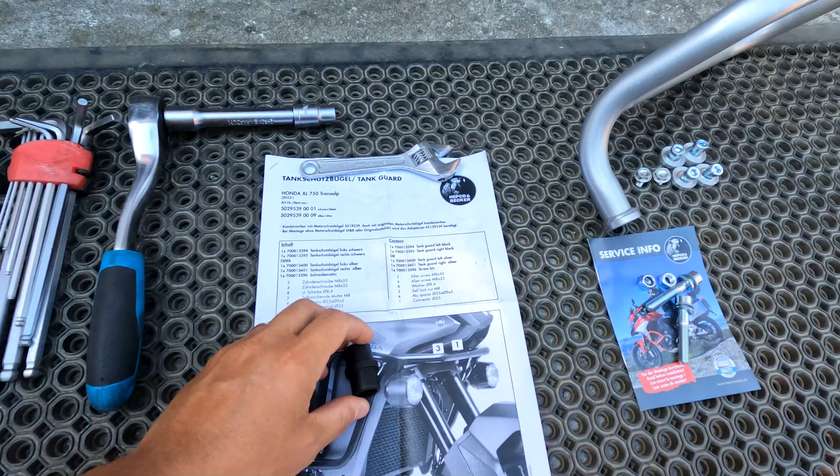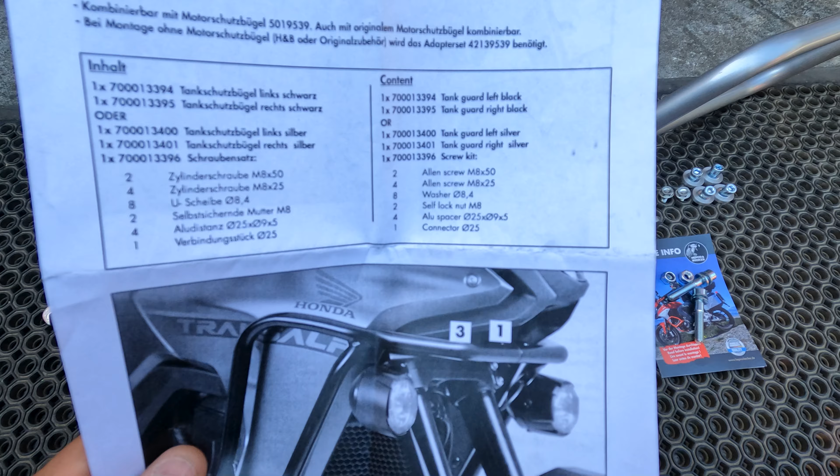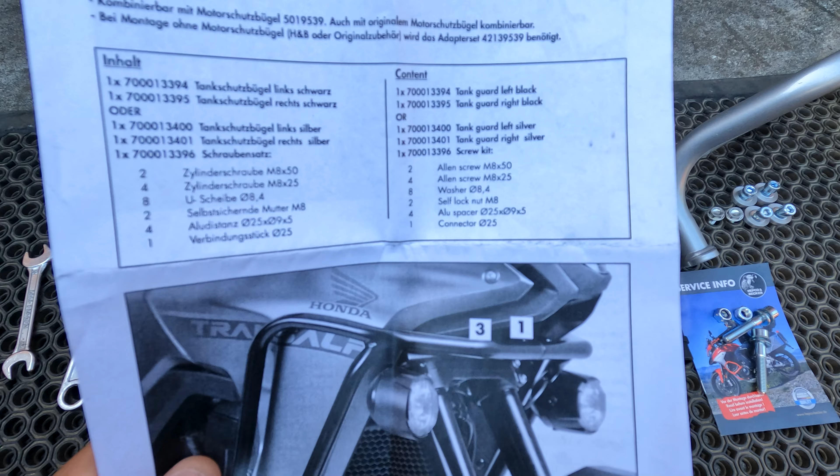Stick around. We received everything from HEPCO&BECKER, everything we need to install it properly, installation guide and so on. In the package we have 2 Allen screws M8, another 4 Allen screws M8 of different dimensions, one shorter, one longer. The longer ones are for the front and the shorter ones are for the sides. We have 8 washers, 2 self-lock nuts M8, aluminum spacers, and 1 connector which will connect both of these tank protector bars. So basically this is it.

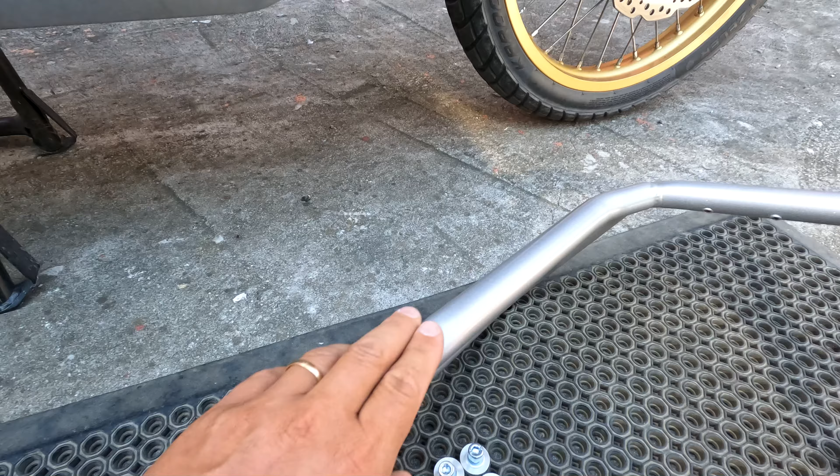The bars are looking quite nice, very quality made. When I compare the color, it's slightly different - these are lighter, but at the same time these were somehow exposed to the sun, so the color is slightly different. We're gonna check them out at the end.

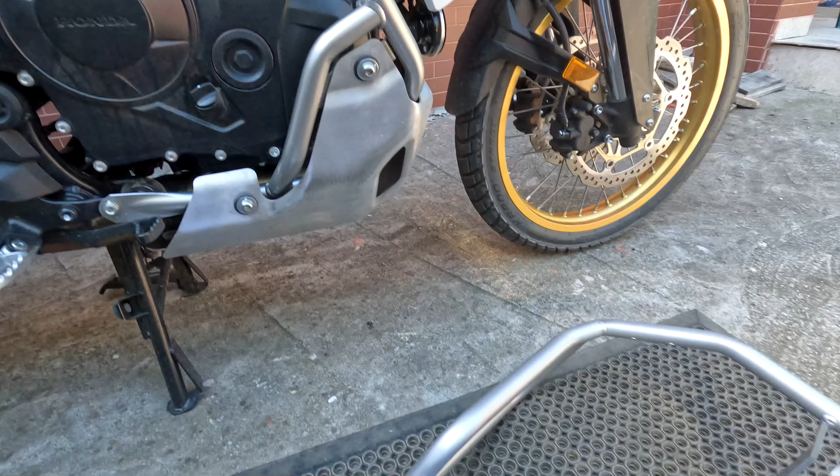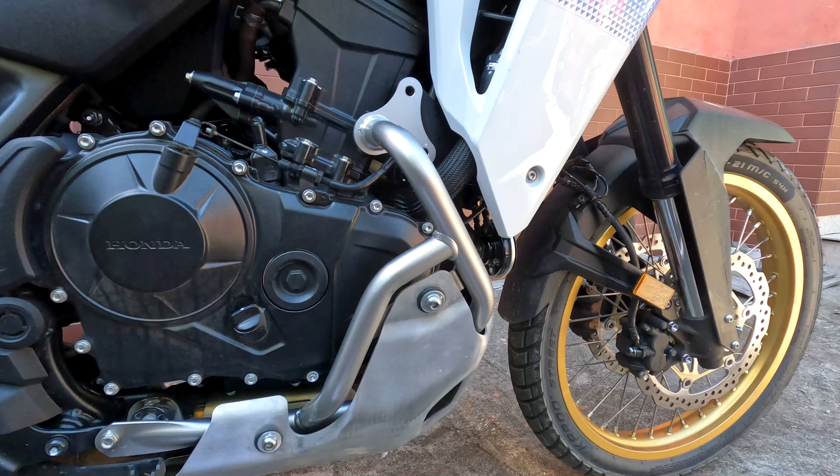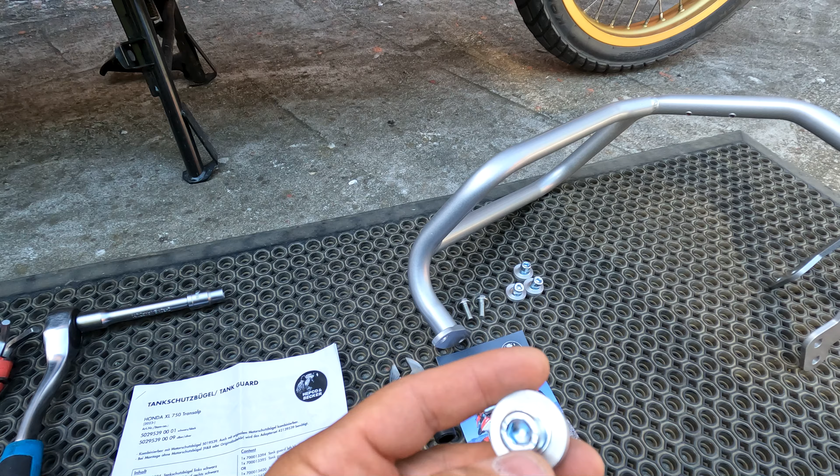What we have here are the bolts and the washers, and what we're gonna do is first try to see how it fits on each side. We have the original screws which we took out - they are slightly shorter than the ones provided by HEPCO&BECKER. These have the Allen screw M8, and one thick washer for each side. So we're gonna use these ones from HEPCO&BECKER and keep aside the original ones, which are slightly shorter. I think it's better to use the HEPCO&BECKER.

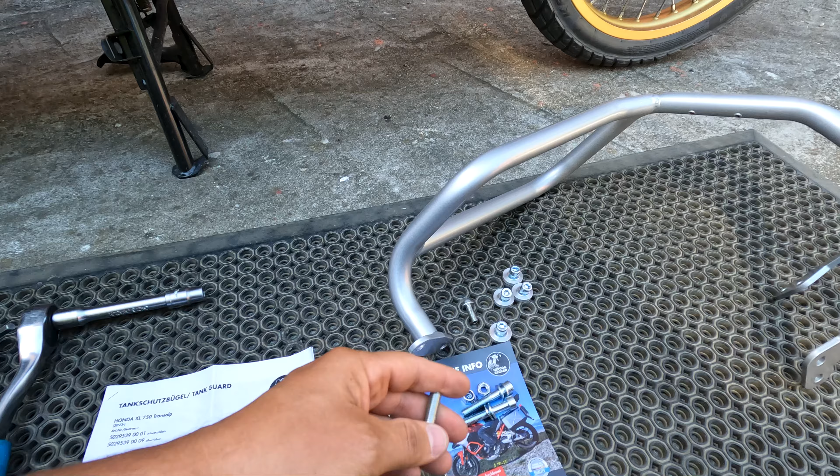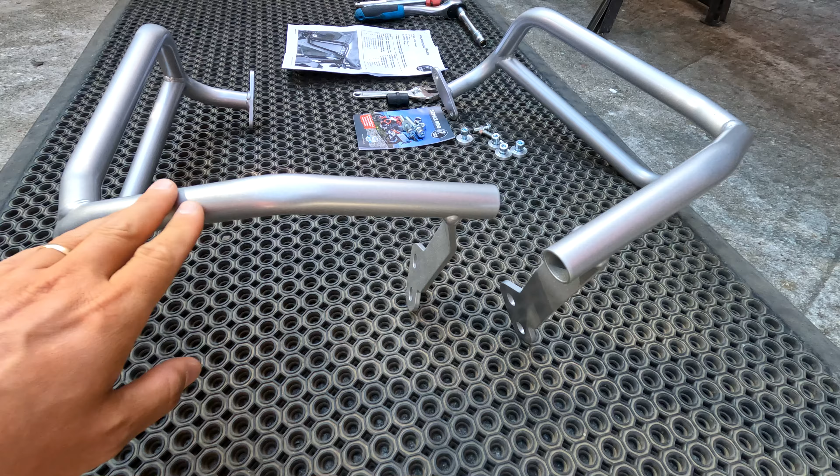These are the bars. What I also liked about them, in comparison with the original ones, is they don't have the fog light attachment, which isn't even a problem, because the fog lights can be attached also in the middle - there are many options for attaching the headlights if you want to. And it has one connection. I think they're much better from this perspective. They are very light, but also quite robust from what I can see.

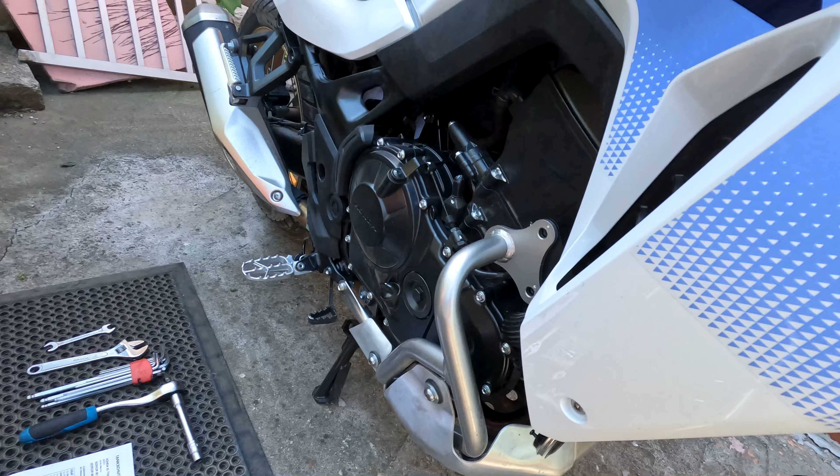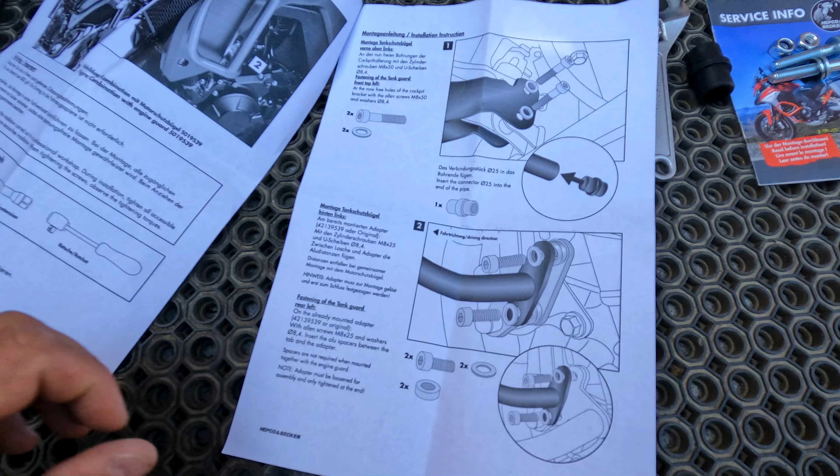They will be attached with 2 bolts on each side, and underneath we have another 2 bolts which will be attached underneath the headlight. Here we have the installation instructions, which are provided in German and English. They are very straightforward.

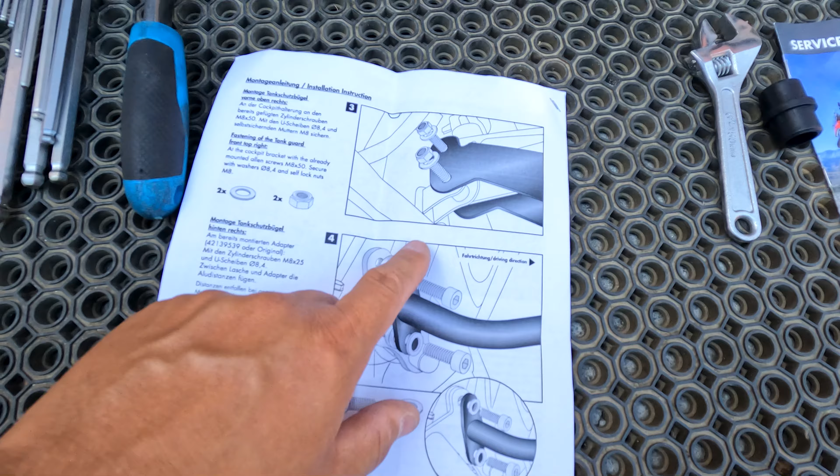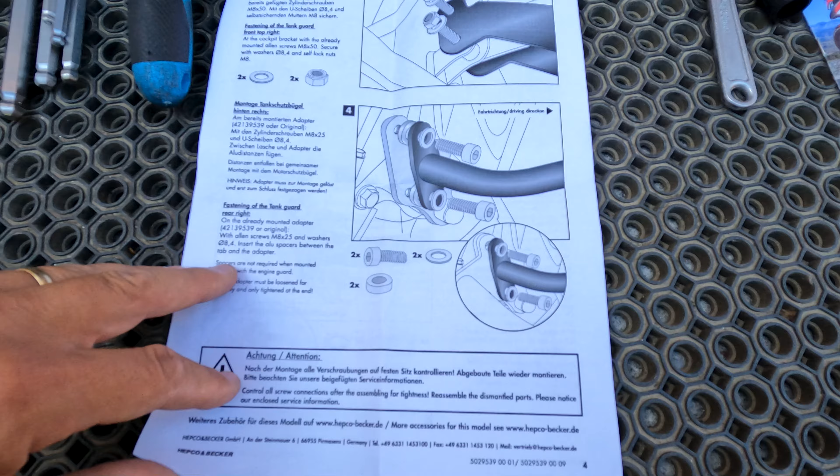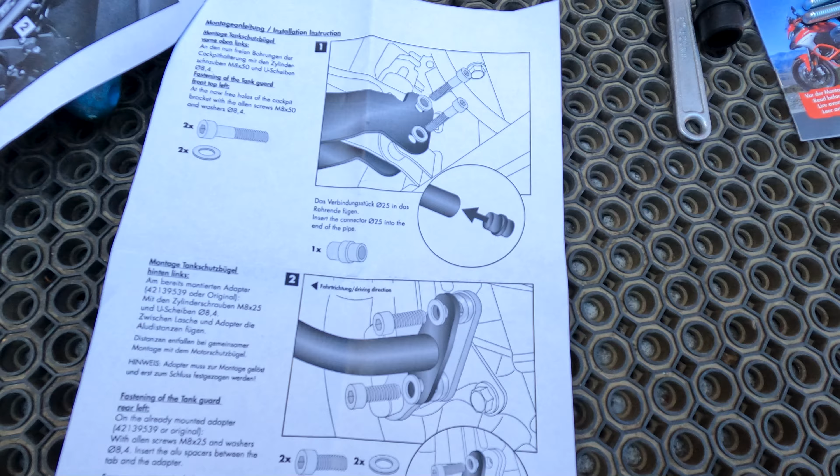2 bolts on the side with a washer - this is for the front side. These are the washers. Fastening of the tank guard, rear right. You have all the provided instructions, so there are a few steps. We're gonna start by unmounting the original screws, and then connect the 2 bars with this connector into the end of the pipe - this is the connector which connects both of the pipes.

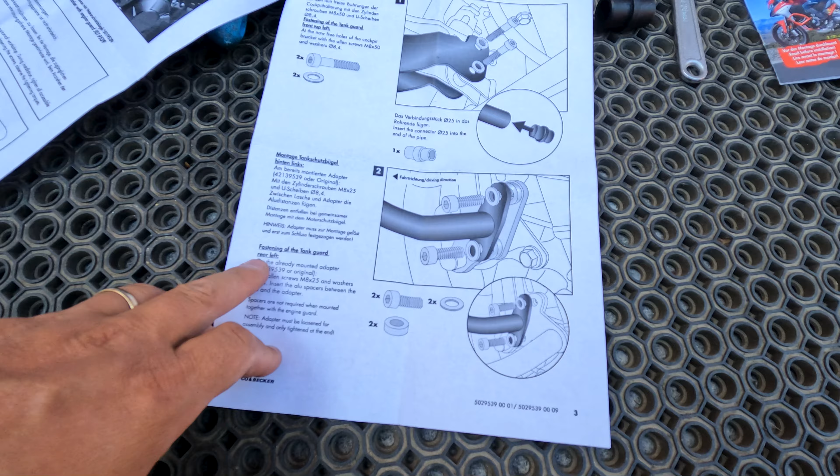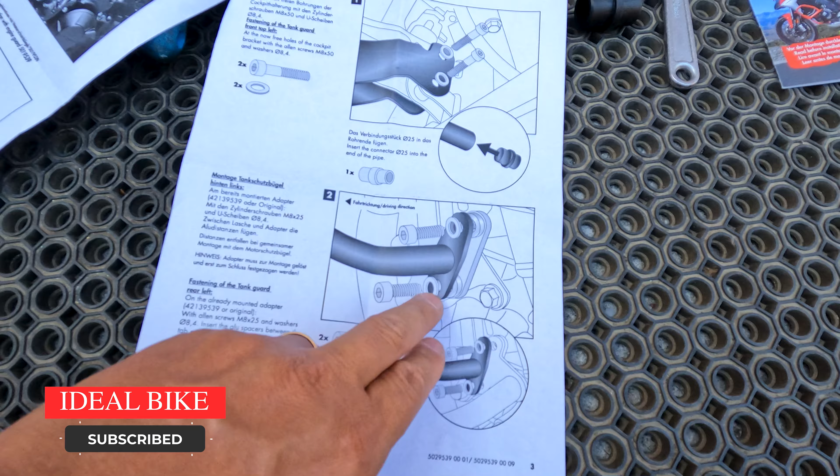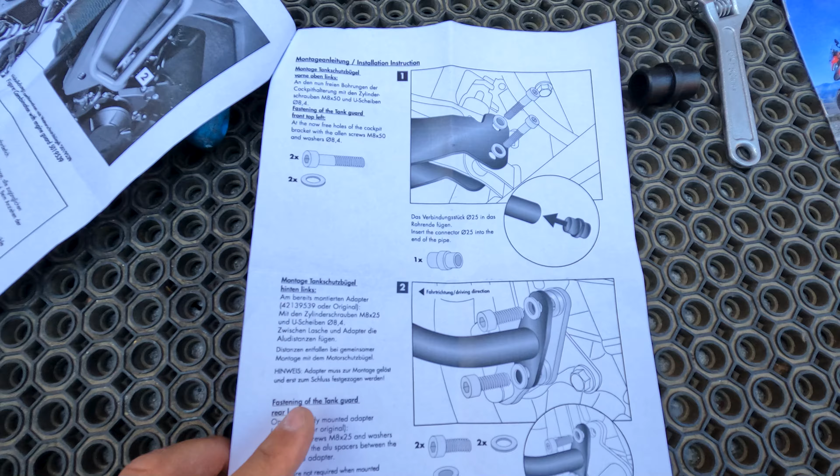Also, we're gonna fasten up the tank guard rear left, rear right with the Allen screws and washers, and we're gonna insert the aluminum spacers between the tab and the adapter, to have a spacer between this new bracket and the adapter from Honda. So it's basically a straightforward procedure, but it needs some care, as always, some special attention and patience to mount it properly.

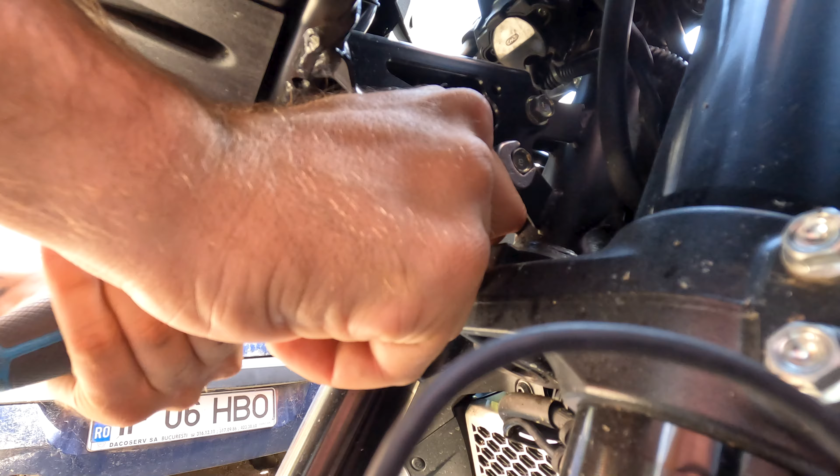First you loosen it up and then you can take it out by hand.

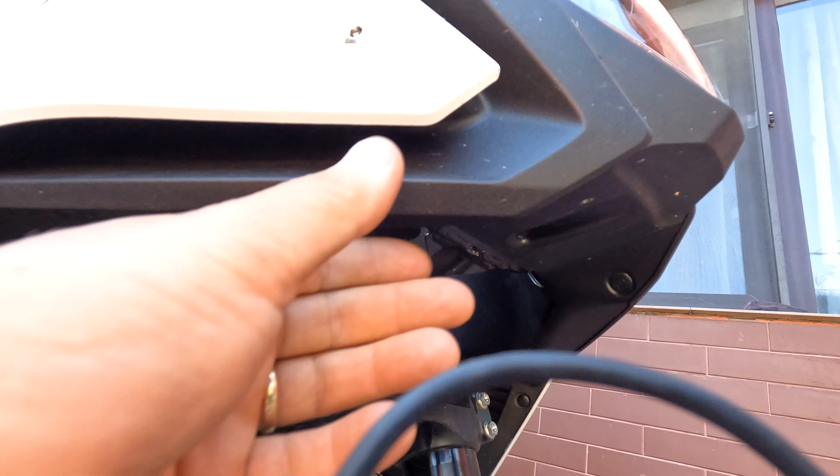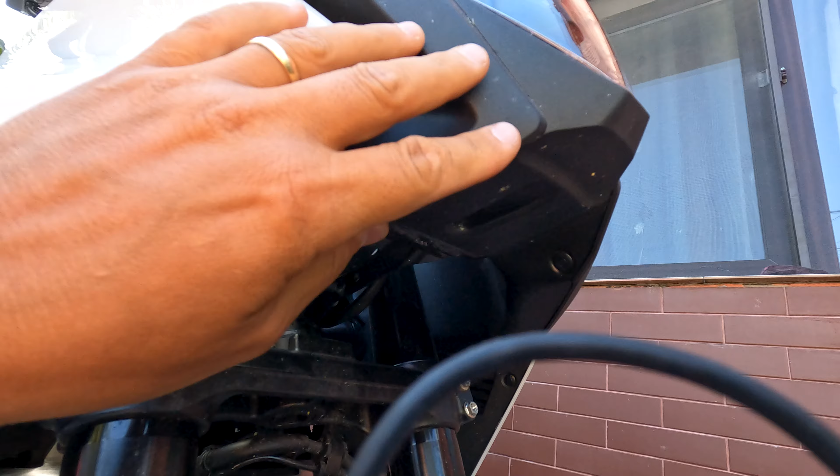There is quite some tension on the upper bolt - you can feel it by hand. There is some tension over there. It's recommended that someone actually keeps this up, because the tension can go into the fenders, the left and right fender. So it's better to pull it up just slightly to remove some of the tension which is already provided underneath.

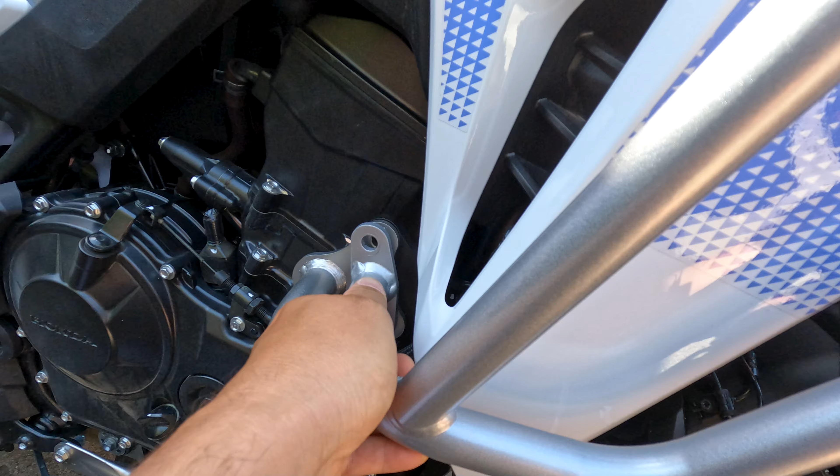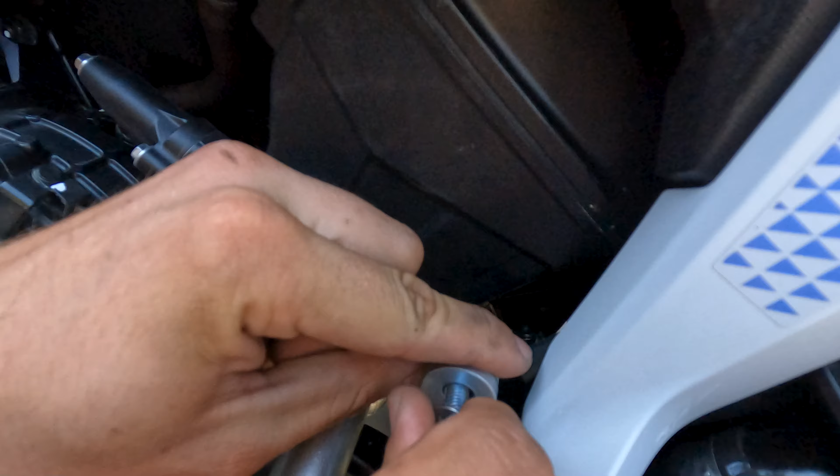You need actually two persons here - one is keeping the bar in position, and the other one is mounting the bolts just to keep them in place. And now we're just gonna put the bar in place, not tighten it up yet, just fix it. We need the free play to be able to mount all the bolts.

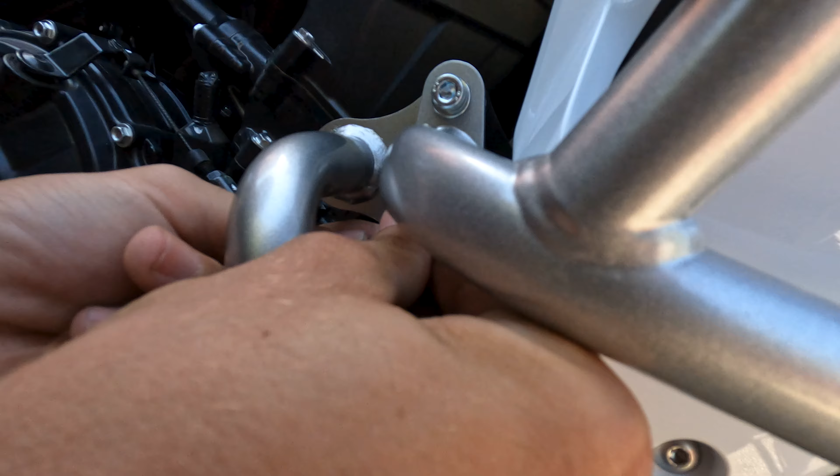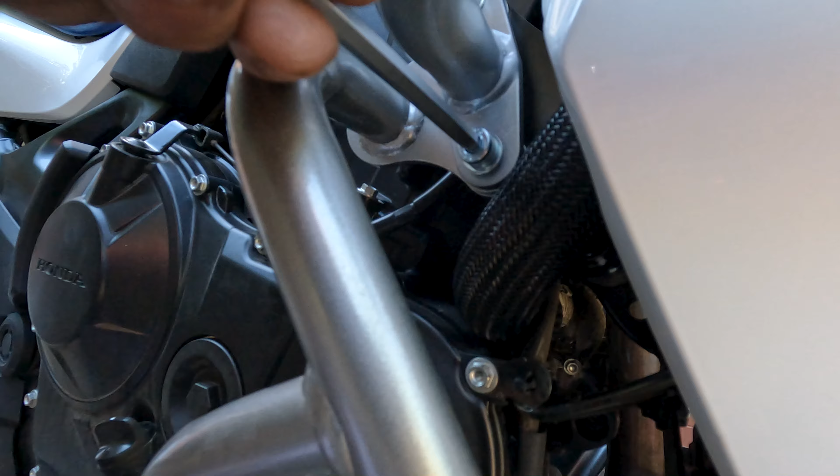They are staying in position. Just slightly tie them up, just to keep them in place.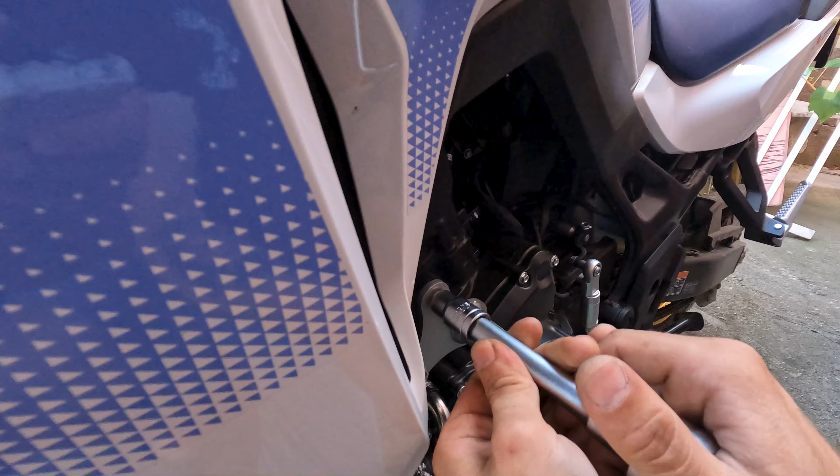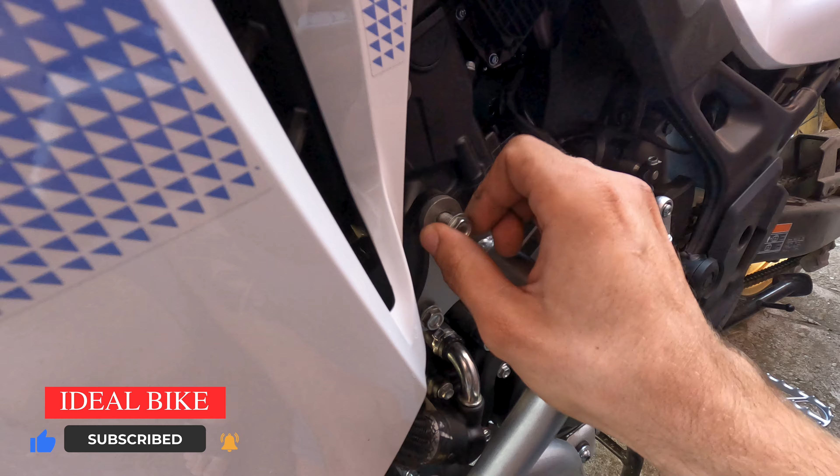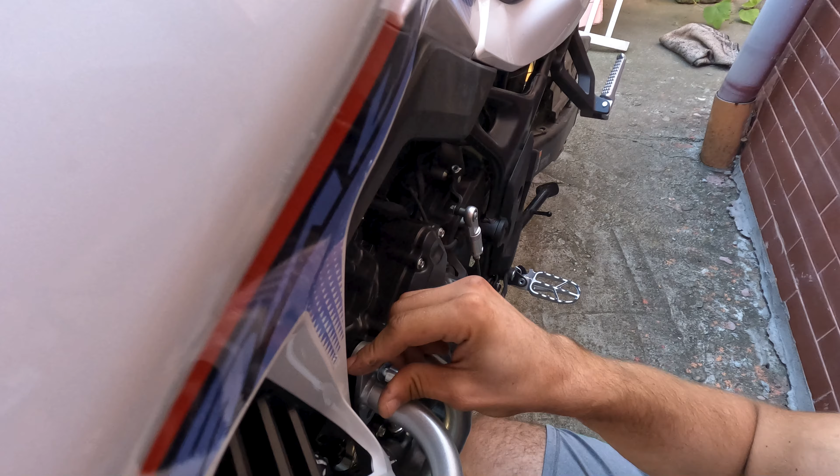And now we're gonna do the same for the left side. Loosen up the bolts, the original ones, and take them out. They are too short in length to use them for mounting the Hepco & Becker tank guard in combination with the original rally pack. So you need to use the ones provided from Hepco & Becker. You can also use the original ones, but they will not go all the way in because of the washer that comes on top. I have to keep it from here in position.

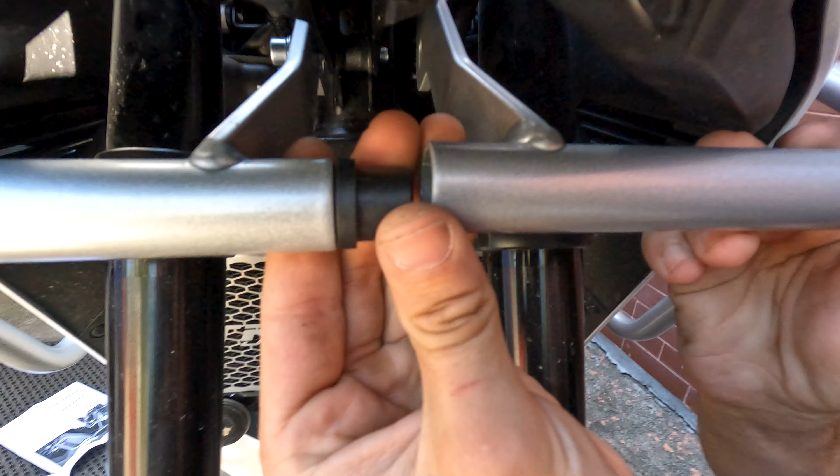Leave them loose because you need free play to adjust the bars properly. And now we're going to install this connector between the pipes. It has only one connector.

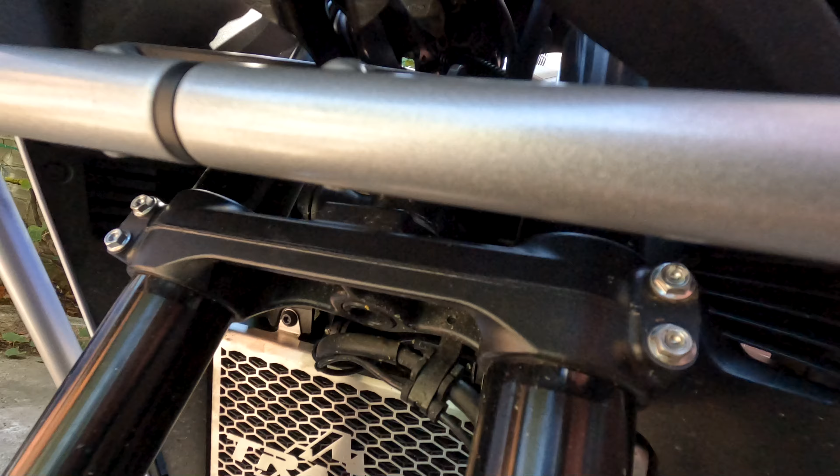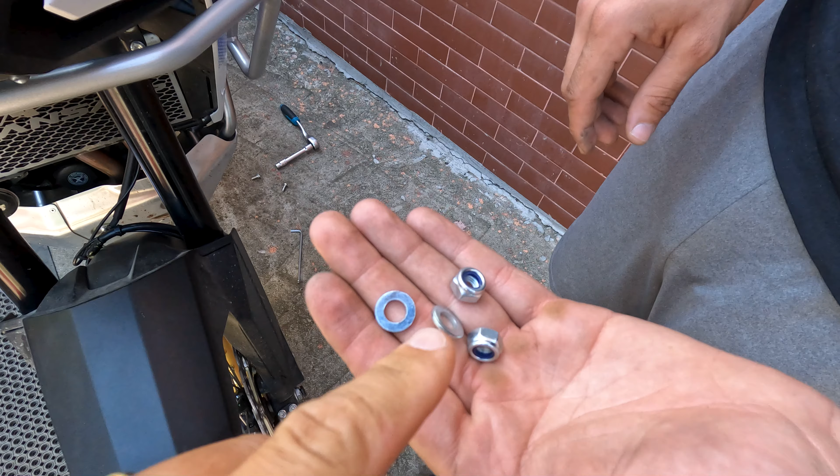Lifting the headlight for just a bit helps quite a lot keeping the bolts in place underneath the headlight, over here on the connecting part of the crash bars. And now we have to put the washers and everything to tie them up, especially here underneath.

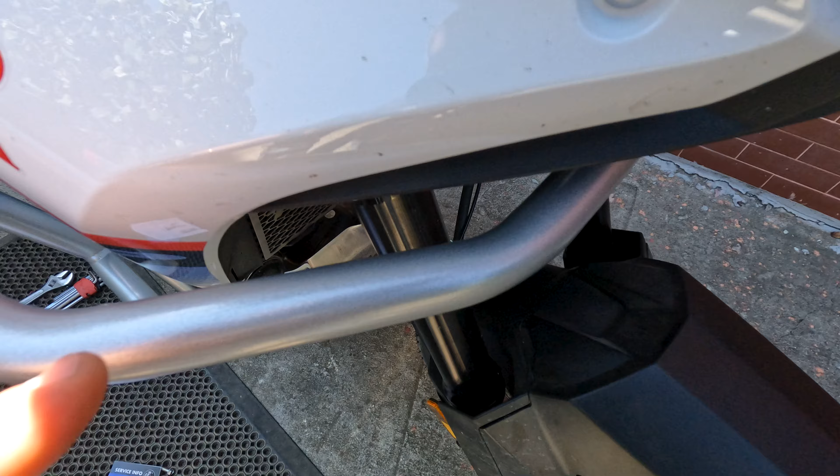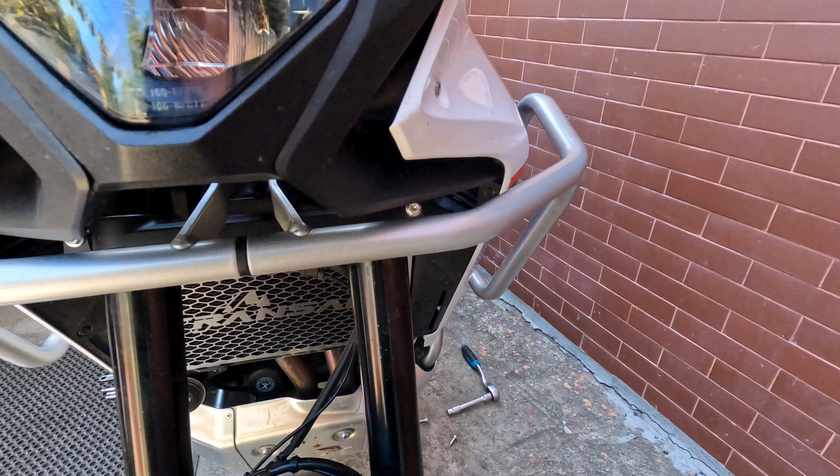We're going to start to do that. We didn't tie it up completely, but you can see the space is perfectly equal, perfectly parallel, straight with the fender. Also here on this side.

You can check it out. It goes also over the bike's frame, so somehow it's very good that it stops here. Let's move forward by tightening up the screws.

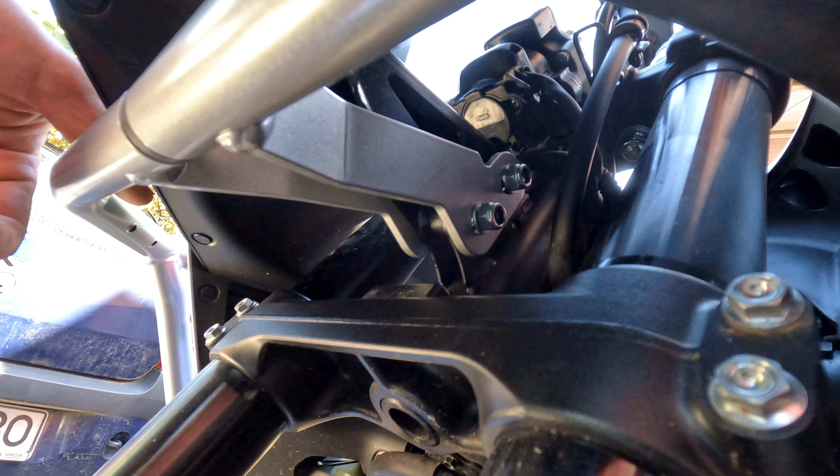There is also a free play over here. We can mount it upwards and downwards. You can either put it up or down, but we're going to leave it slightly down because we would like to have more stability, more grip on this side, so we don't need to push it up too much.

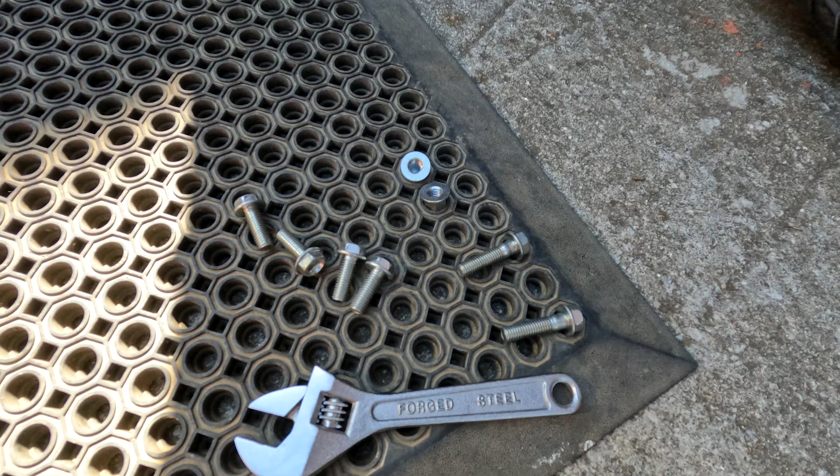These are the old bolts, these are from underneath the headlight with their washers and bolts, and these are the bolts from the side. So these are the old ones. We're not going to use them. We're going to use the provided bolts and washers from Hepco & Becker.

And we have a 6mm Inbus for these two bolts, and also 6mm for the one from the side. Also 6mm.

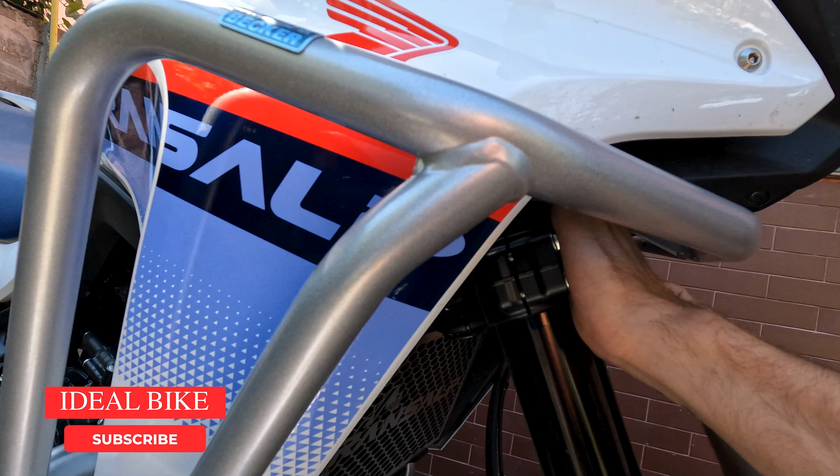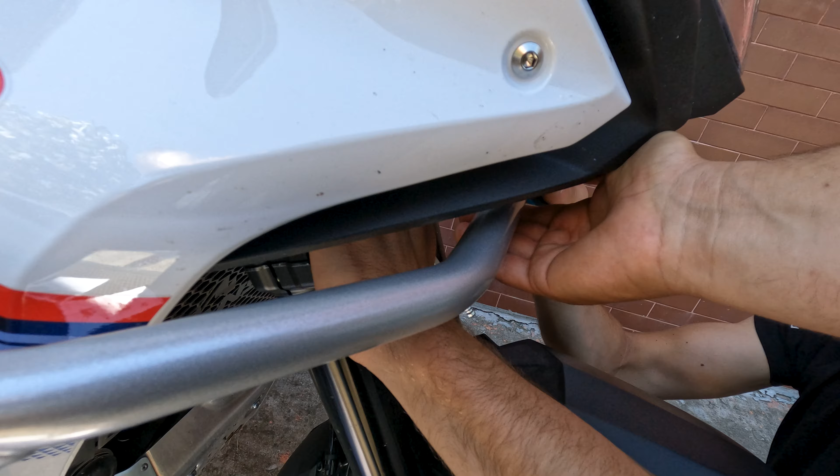Let's lift it a little bit. We're going to lift it just a bit. Ask your neighbor to help you lift and help you mount this crash bar in order to protect the fenders and not scratch it.

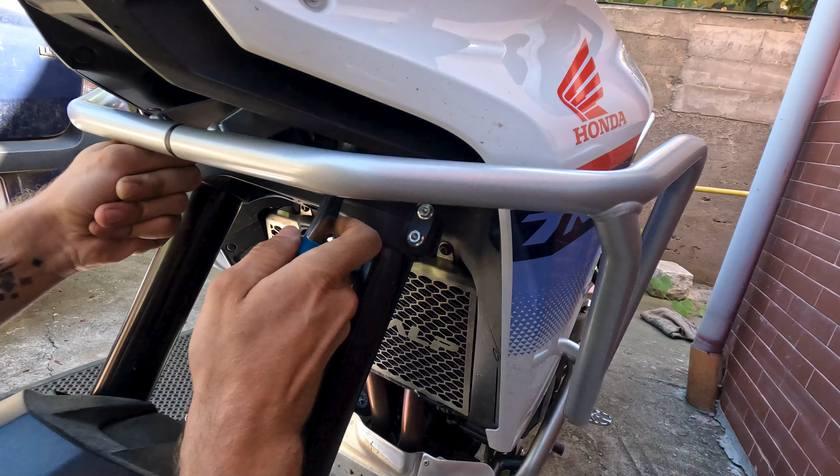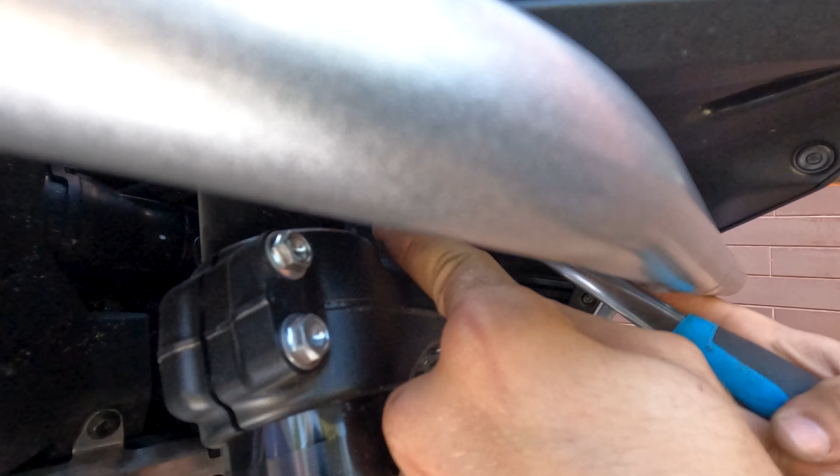The space is quite narrow. You need to make some space in order to tie them up.

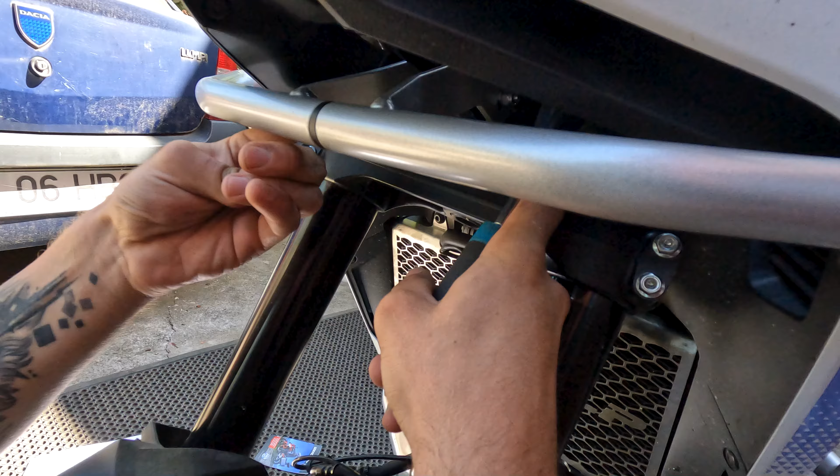Take your time, as usual. Patience is a virtue. You can put 25 Newton meters for these bolts.

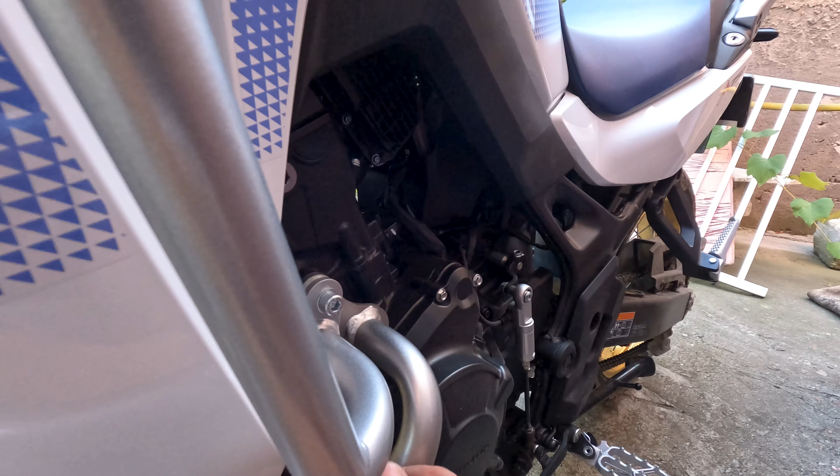And now we are for the sides. Put 35 Newton meters, just to be sure. 35 Newton meters. If you have a torque wrench, if you have experience, you don't need it.

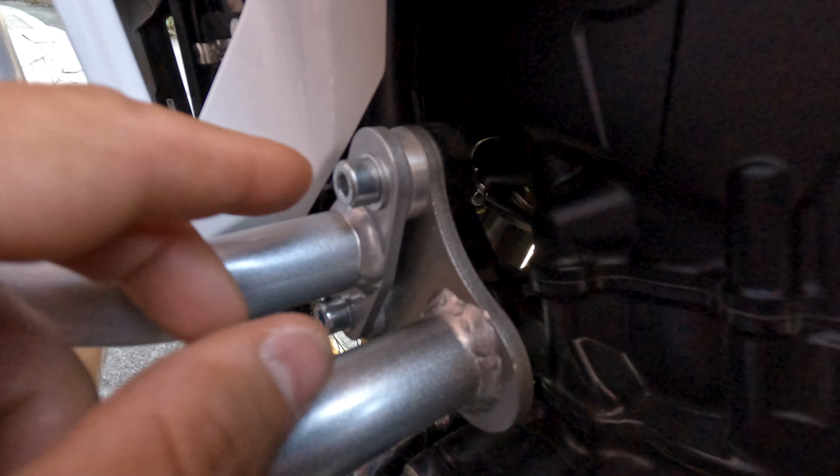Regarding the length of the screw, if you put your finger, then you can feel the end. It's not exactly to the end. There's still 1, maybe 2 millimeters, but I think it's about 1 millimeter distance until the end.

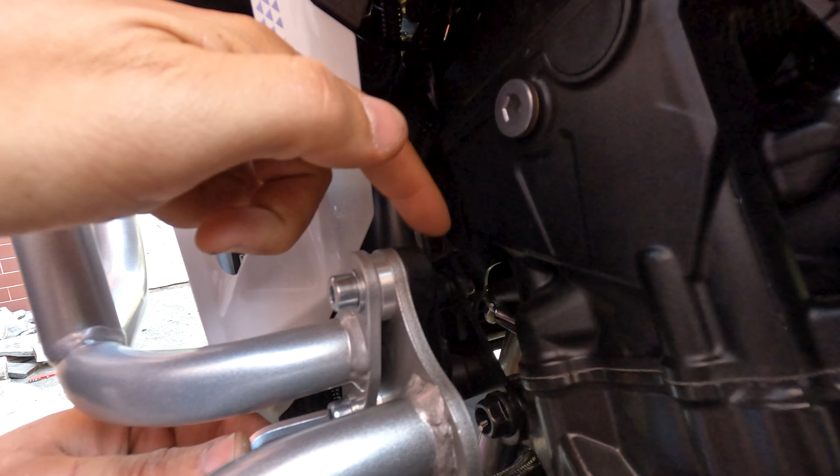After you tie up the bolts from the side, you will notice that you need to tie up once again the bolts from underneath the headlight. So make sure you double check it both ways. So after you tie it up, don't give up.

After you tie it up here on the side, check it once again, because it will become slightly loose, and tie it up once again upwards. You don't need to tie it up much after you tied up these bolts, but there is slightly an overcheck, and as you can see, we still need to tie it up one more time at the end.

And this is it, guys, the Hepco & Becker crash bar or tank guard. It looks, in my opinion, much better than the original one. And also it has more space between the fender, which gives you somehow more protection for the side of the bike.

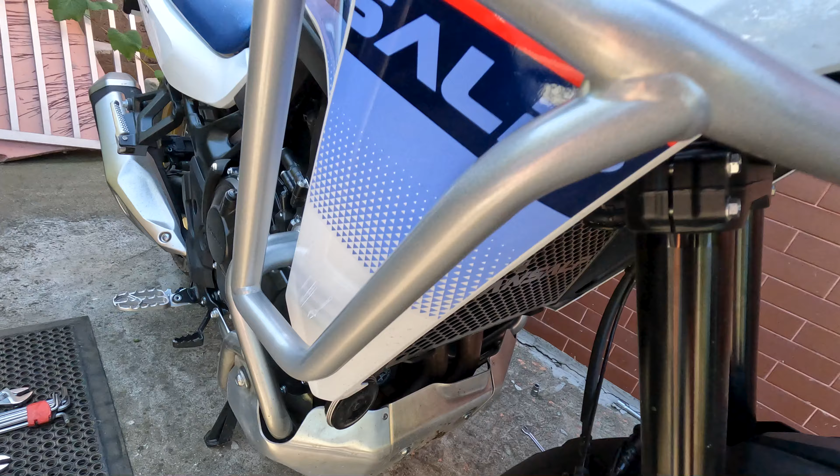If you check it out, you will see that it overpasses the exhaust by more than 1 centimeter, if not more. So I really like the design and the functionality. It starts from underneath over here. It overpasses also, if you can see, the engine guard and the skid plate.

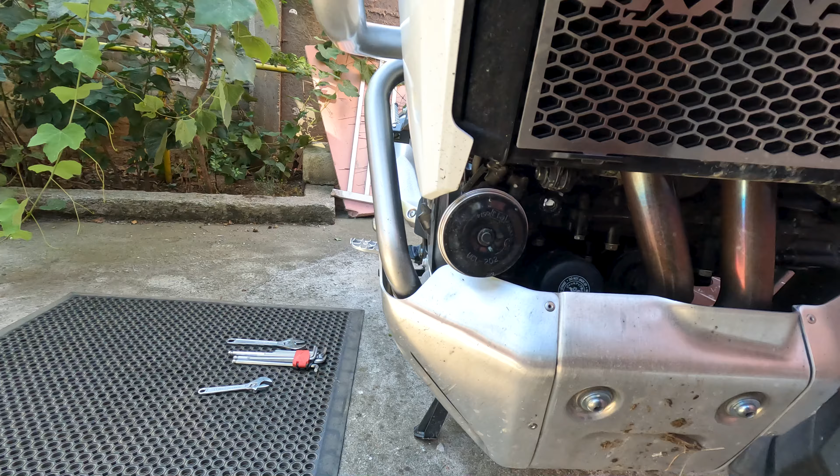I have to admit that the Hepco & Becker engine protection is much nicer. It's wider. But yeah, it is what it is for the moment.

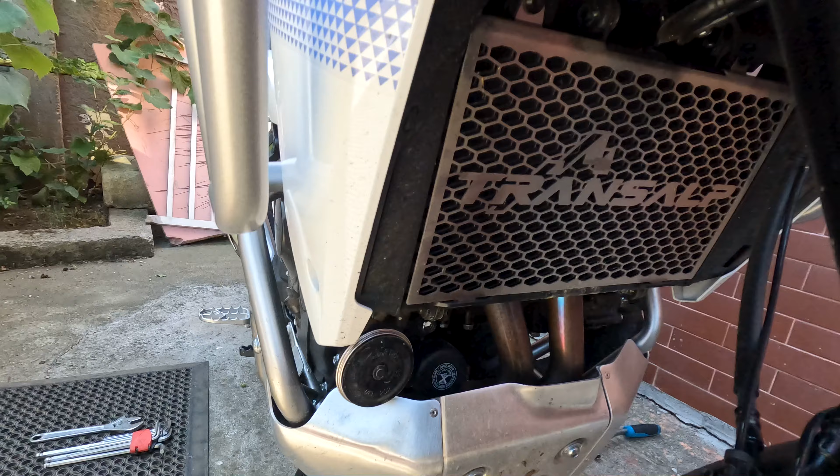I'm having the rally kit plus the Hepco & Becker crash bars. They are very solid, with only one connection here, versus 3, I think 3, for the original one. So you have a more compact protection for the fenders.

And you can see here it also overpasses the pillion foot peg over there. So it's quite nice. What I still have to do is to change the hand guards.

In the future, in the very near future, with the Acerbis ones or the bark busters. But this is it, this is how the Hepco & Becker crash bar looks. You can also fix it with your original Honda accessories with no problem, as you could already see.

It covers slightly the TRANSALP logo, which is not so nice, but we need to protect it.

And now this is the look of the bike. The TRANSALP logo is covered by the crash bar, and also here you can check it out.

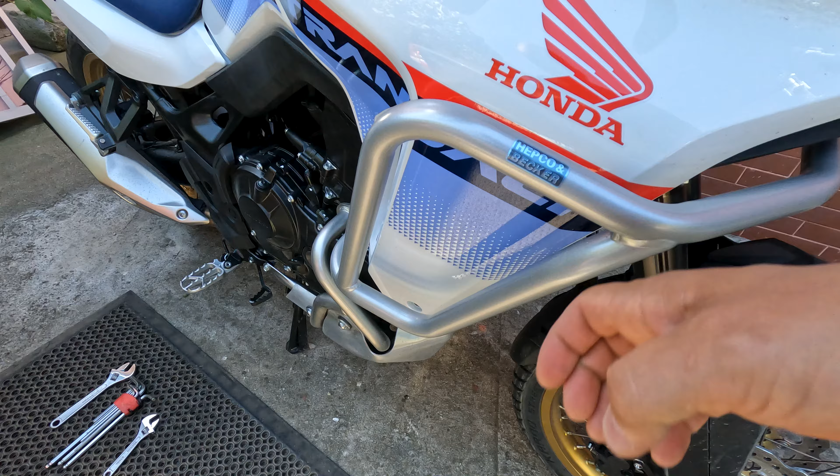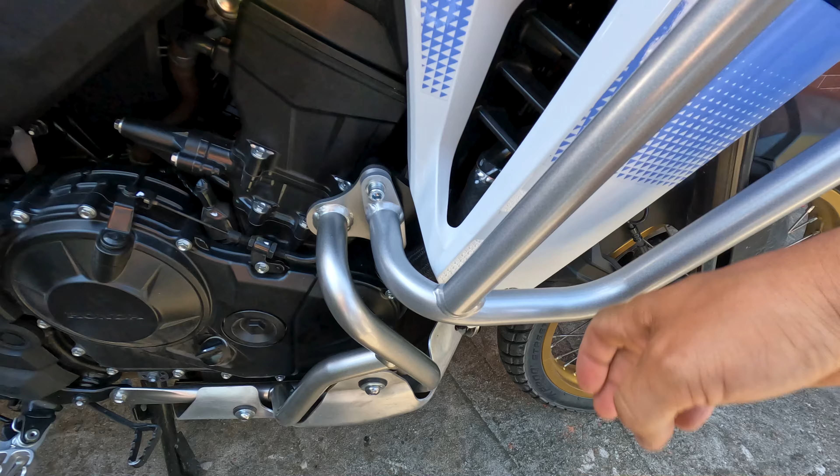And I have to be honest, the sound, it sounds more full, more thick than the original one. So this is the original one. Hopefully the...

This was the installation process for the Hepco & Becker crash bars, which were mounted on my TRANSALP 750. They fit perfectly with the original rally pack, and also they provide, in my opinion, a better option than the original crash bars.